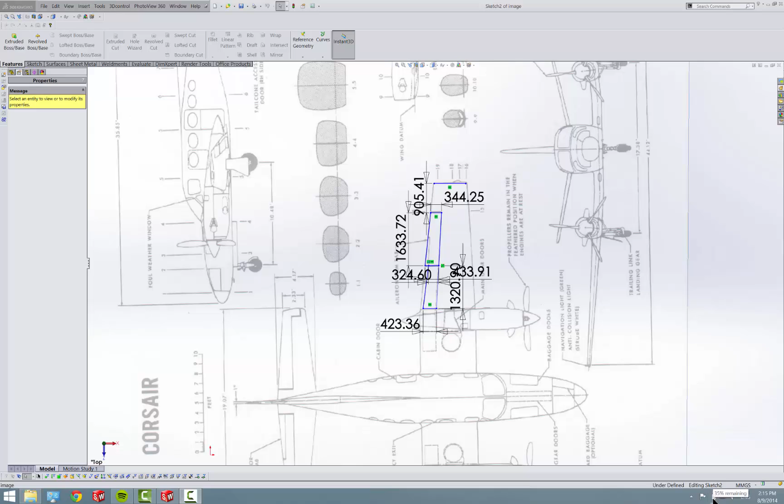Okay, so we're going to work on the nozzle now, the nacelle, the engine covering basically. And how I'm going to do that is I'm going to delete these first because they're kind of in the way. So, hold on. Yep, delete those.

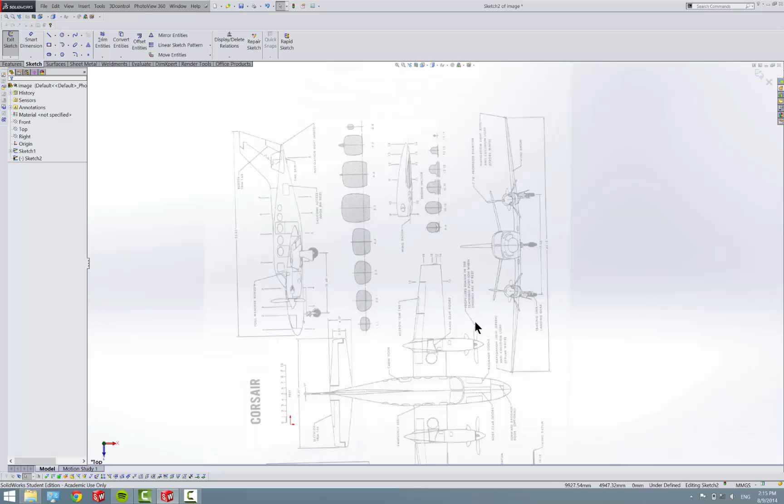In this 3 view, they gave us some nice cross sections here, which will be really useful. What I'm going to do is make sketches and turn those sketches into blocks, just like we did with the airfoils. Make these sketches and then import them into a new part and loft between them all, and it'll make a nice, as close as we can, shape to this. So the first step is...

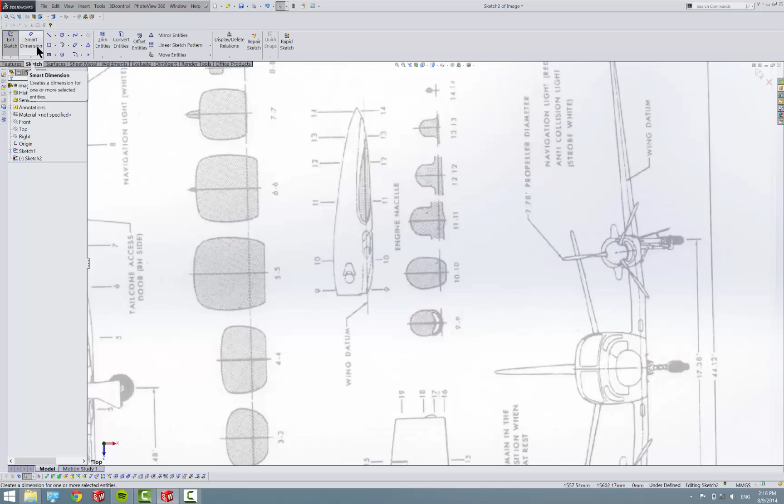So we have a sketch open already. How I'm going to do this is we're going to use splines, which are kind of their own beast in SolidWorks, but SolidWorks handles them much better than something like Pro Engineer or some other programs.

In 2014, I don't know if you're running 2014. If not, you should, because it does have some newer, nicer things. You could always just torrent it, but I didn't say that.

So I'm going to use style splines because they are very, very useful. And the way style splines work is you make construction lines, and anywhere that your spline crosses a construction line, like right there, it's crossing, it's called an inflection point. And if you haven't had calculus or something, an inflection point is where the spline changes its curvature.

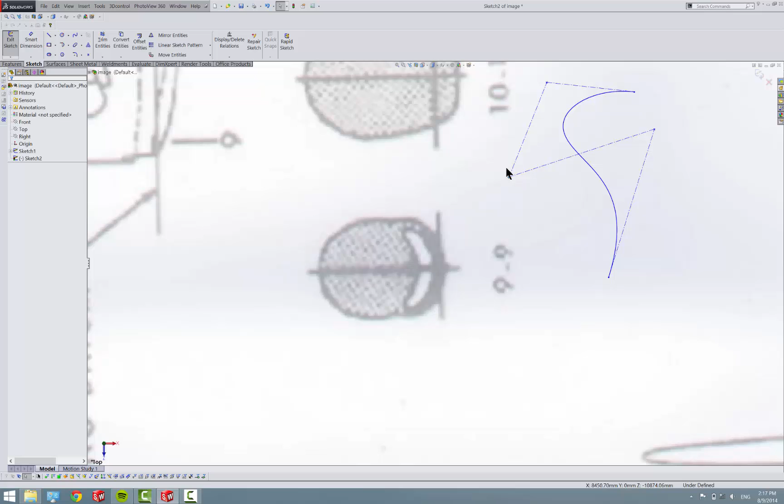So for instance, here it's curved inwards, and it crosses the line and it curves outwards. So that's just kind of something to be aware of, and you change it by changing these handles, and you can make all kinds of cool curves, perfectly shaped and all that. So that's new in 2014, and I gotta say I love them very much.

So we're just going to kind of make it so that it looks right. And I've already made this before, so I know what pattern kind of looks correct. So it took a little bit of tweaking to figure out that this is the kind of shape I needed.

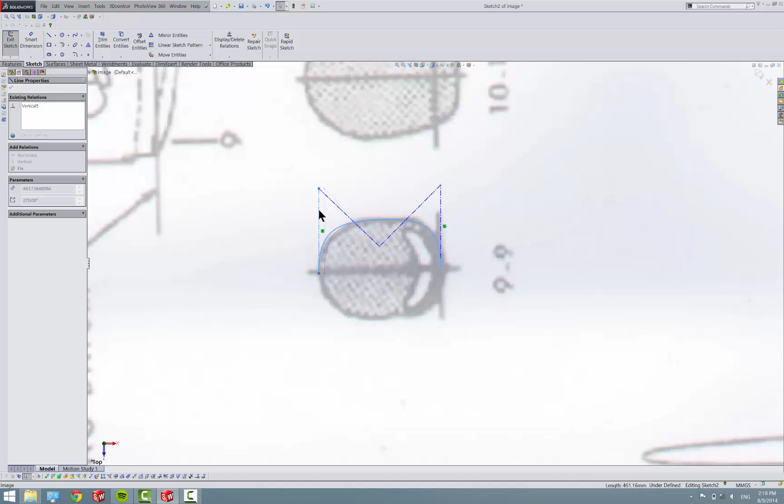It's very important to make sure that these are both either vertical or horizontal, one of the two, because whenever you mirror them, you want this face to be tangent, this seam, because otherwise you'll have a seam in your end result, which is not a huge deal, but since we have the power to avoid it, we're going to try our best. Make sure they're vertical because we're going to mirror it across.

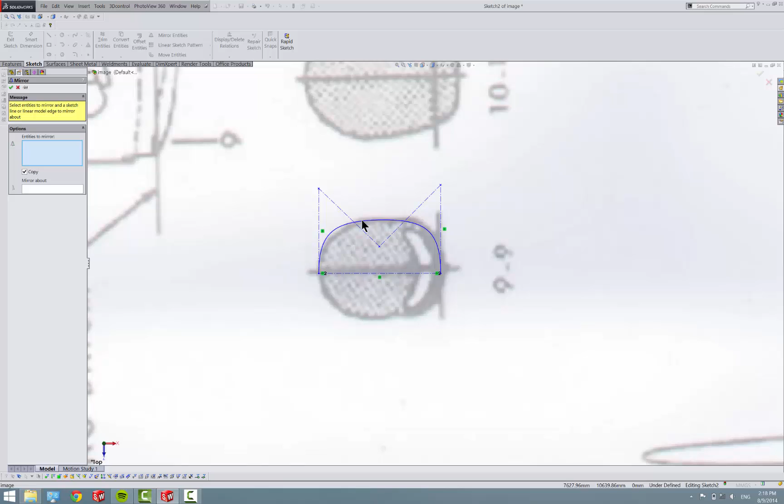And while we're at mirroring, might as well put a center line through, and then mirror that through that. And now we're going to fine tune it a little bit. So we're going to move the mirror line closer, adjust these so that they look a little bit more accurate. So that looks pretty good.

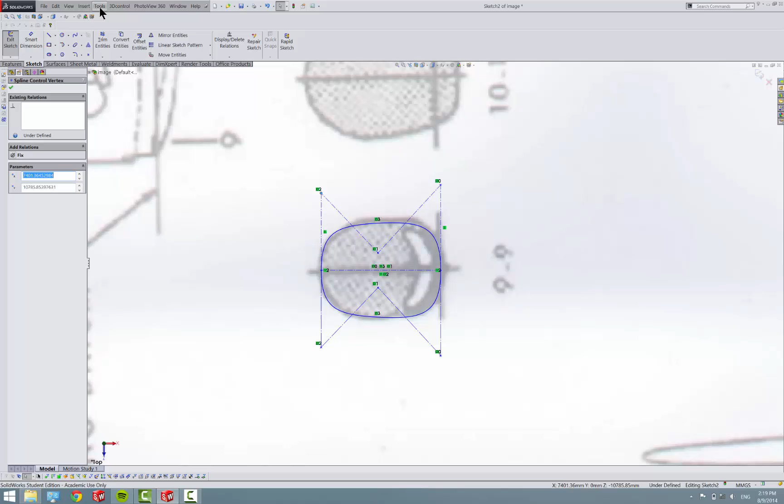So we're going to go to Tools, Blocks, Save. I'm going to save it as Profile 1.

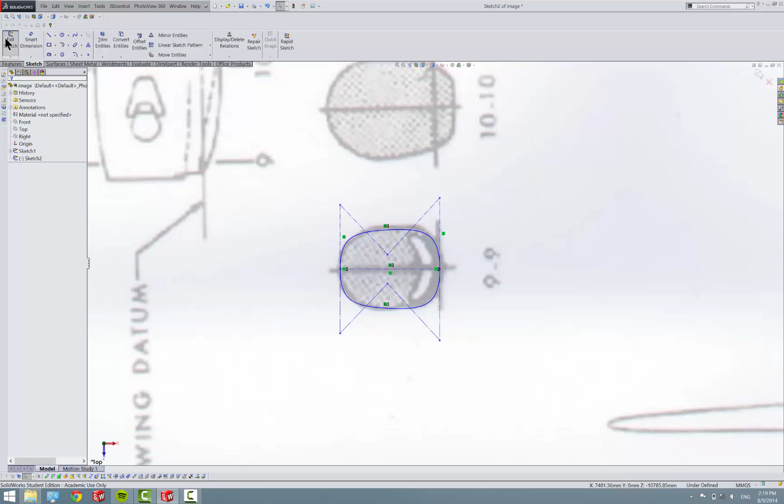Okay, and then we're going to exit the sketch and then make a new sketch on the top plane. And then we're going to do the same thing. I'm going to do 2 of these just to kind of show you what to do. They're all really the same, so I'm not going to waste the precious video time showing you the same thing over and over again, as I'm sure you're already tired of seeing.

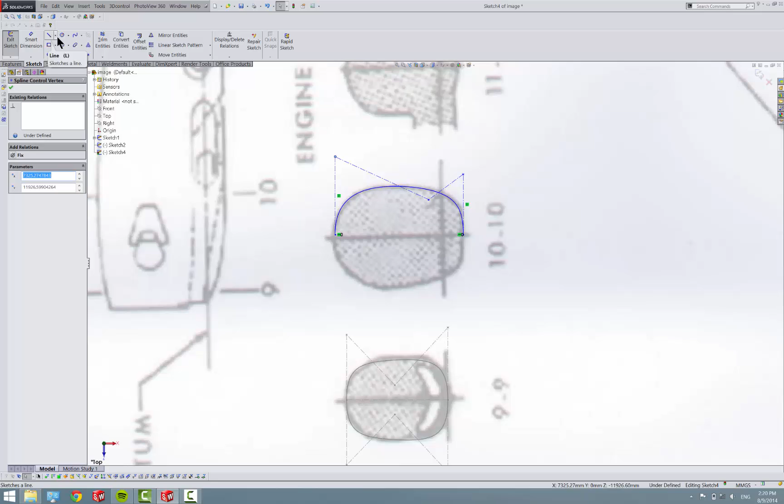But there is one important thing that I want to point out. You just kind of gotta fiddle with it. That looks pretty good. And mirror it. And adjust this line a little bit.

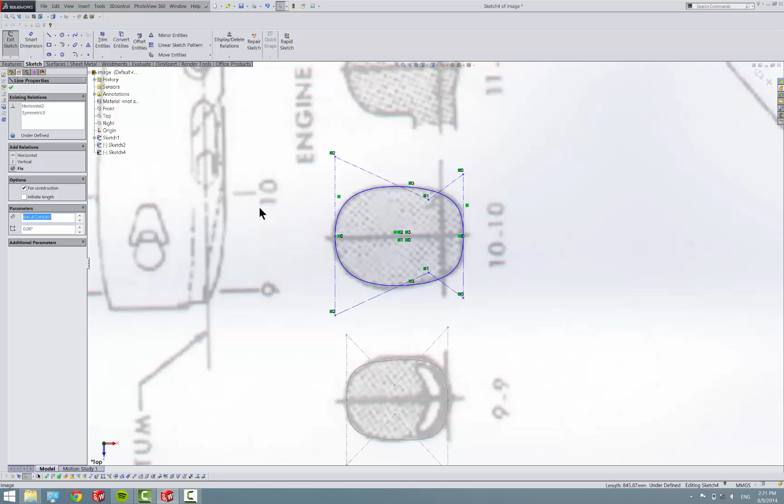Okay, now what I was saying that's really important is you'll see how they put a line clear through, and I like to think of that as my origin line. And so for this sketch, the origin line is right at this point. For this sketch, the origin line we're going to have to draw. I guess the correct word for it is datum, the point of reference. And put that...

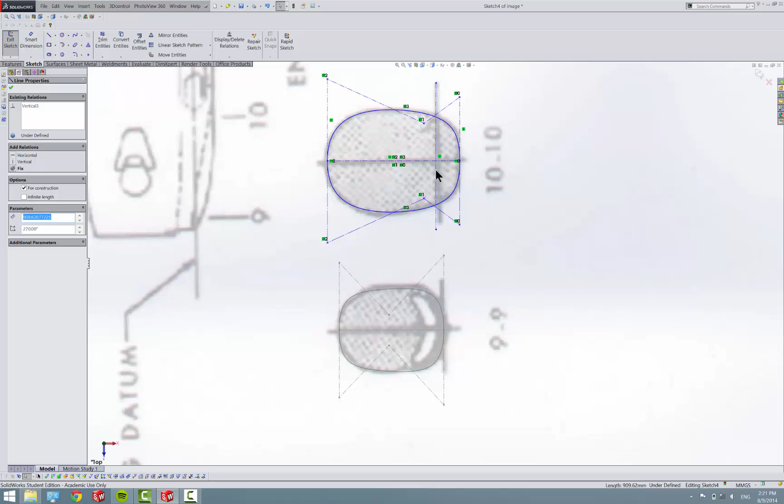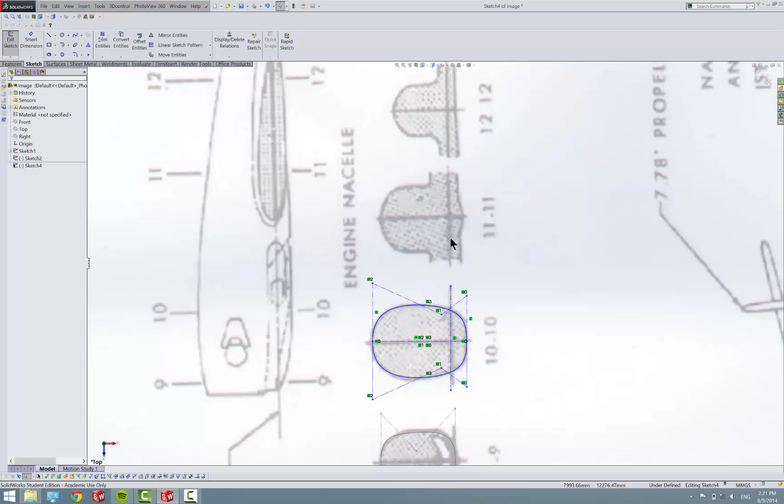Right there. So now what we're going to do is whenever we put all these sketches into its part, we're going to line up this, and that'll keep everything perfectly in line. Now, and then you're going to save this as a block. I've already gone through and made all of these, and for these, just don't worry about that. That's the wing, and we'll incorporate that later. So that's how you make them.

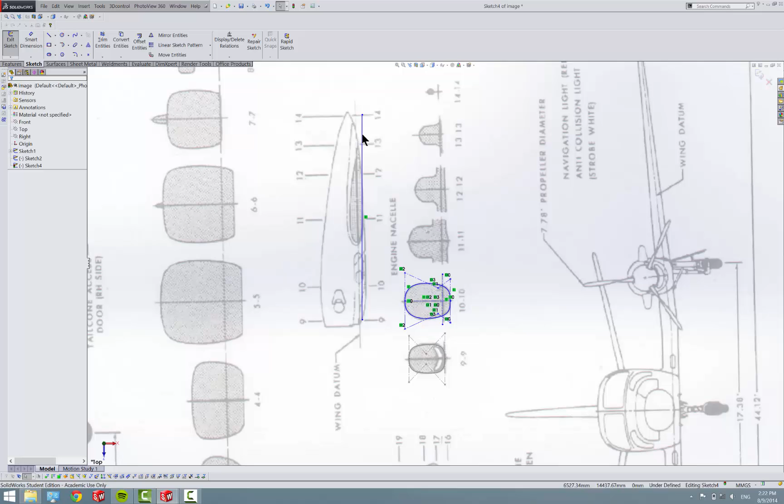I'm going to show you how we loft them together. So we're going to make a new part. And, well, one thing, we need to know how far apart to put our planes. So these are our corresponding plane references. And the way I do this is I put a line between the two. And then you right click the line and do split entities, and just come along and split the line up, and then dimension it.

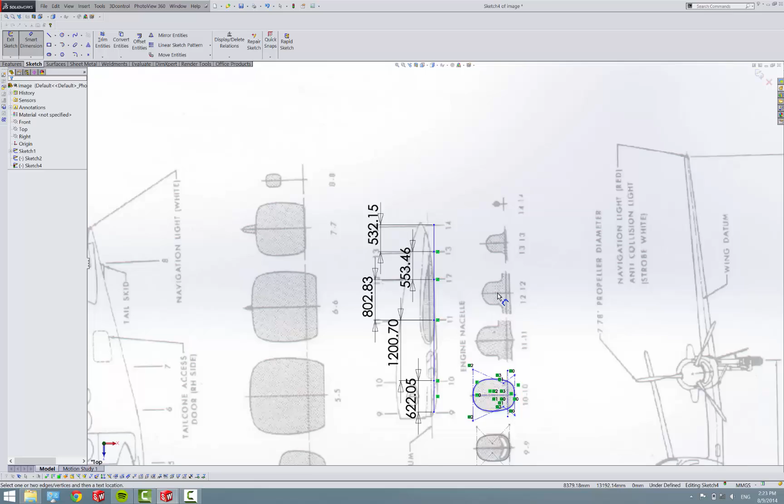Okay, so we've got that all figured out. Now we need to go and make our planes in our part.

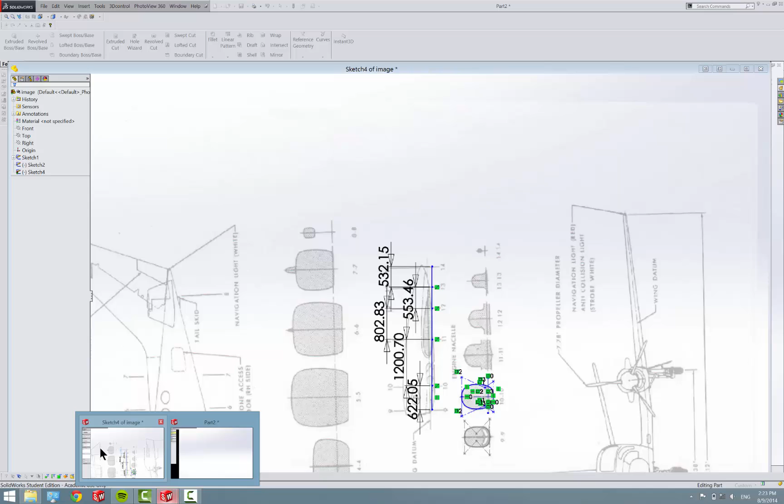So, feature, reference plane, we'll go off the front plane. And the first one is offset by 622. I'm going to flip it because that seems like the appropriate way to put it.

And then we're going to put another plane in reference to that plane, flip it. That is 1200. And then another plane, and that is 800.

Once more, 550. And 530.

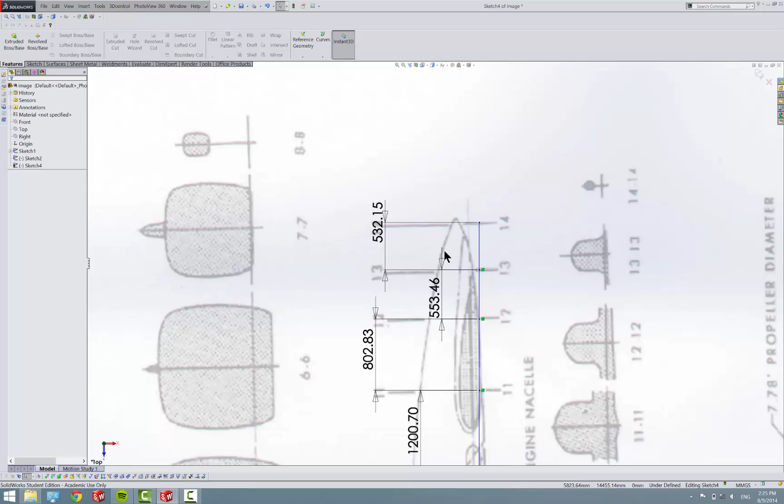Okay, so we got our planes set up. And then what we're going to do is put sketches on each of our planes. So put a sketch on the front plane.

We go to Insert - not insert, tools, blocks, insert, browse, Odesk, Cessna, and here's all the profiles I made. So profile 1.

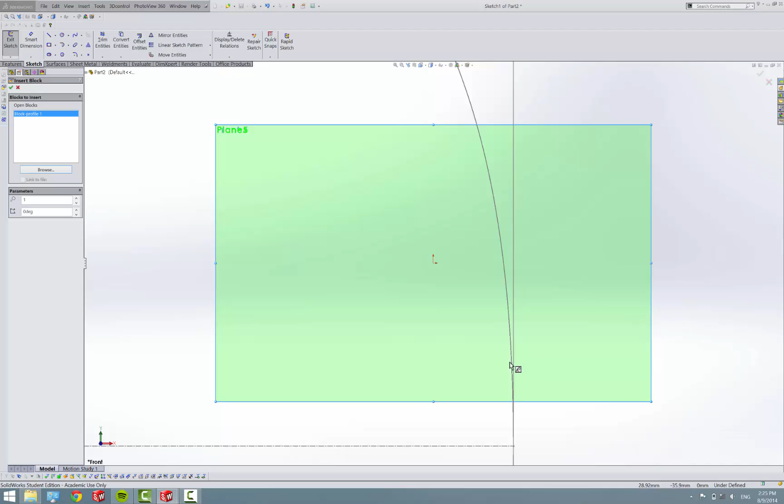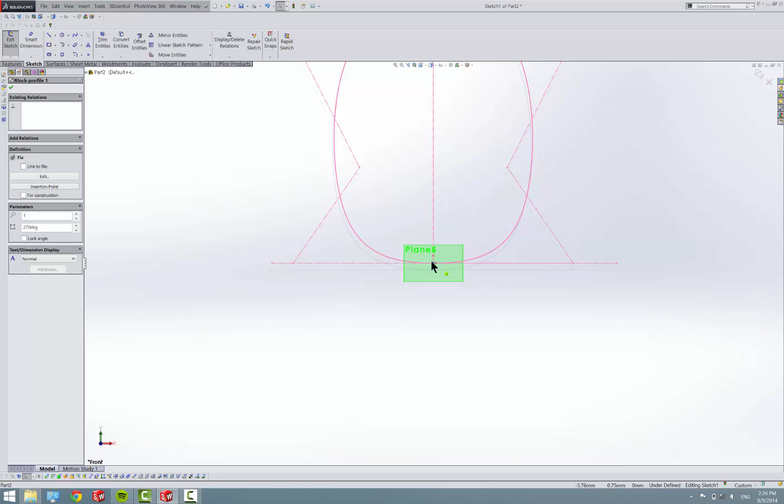Now you'll notice it is sideways, so we'll go to rotate, select, center rotation, about the origin, oops, minus 90. And then we set up our datum line onto our origin, and exit that sketch. So there's our first piece of the skeleton.

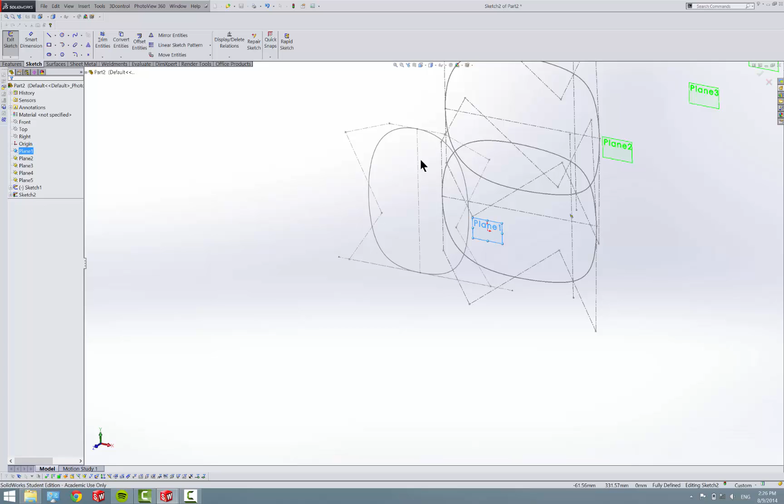Put a sketch on the next plane. Tools, blocks, insert, browse. We'll rotate it. Oops, I pressed escape.

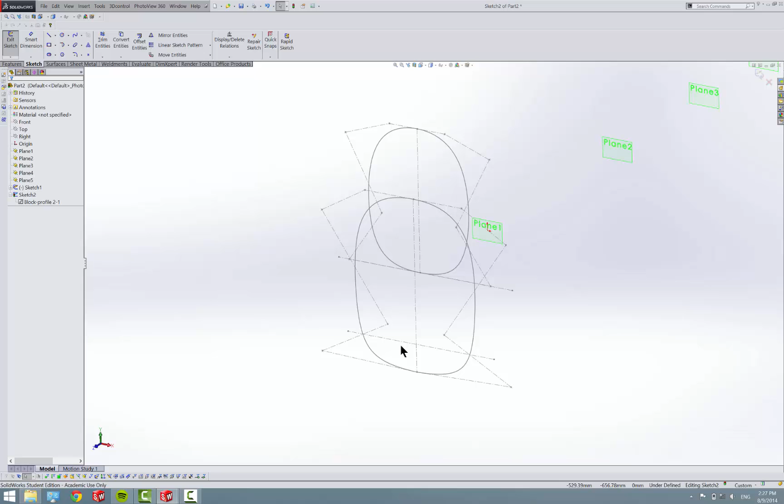I guess I forgot to put the points at the intersection when I made these. So we'll just come in and put a point.

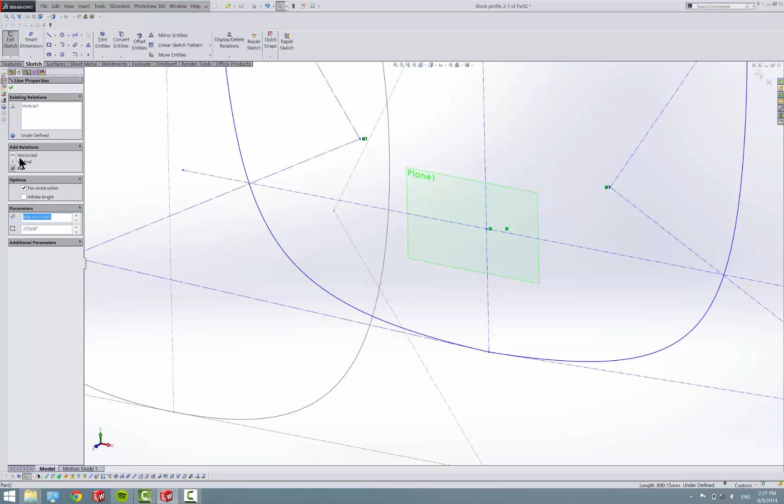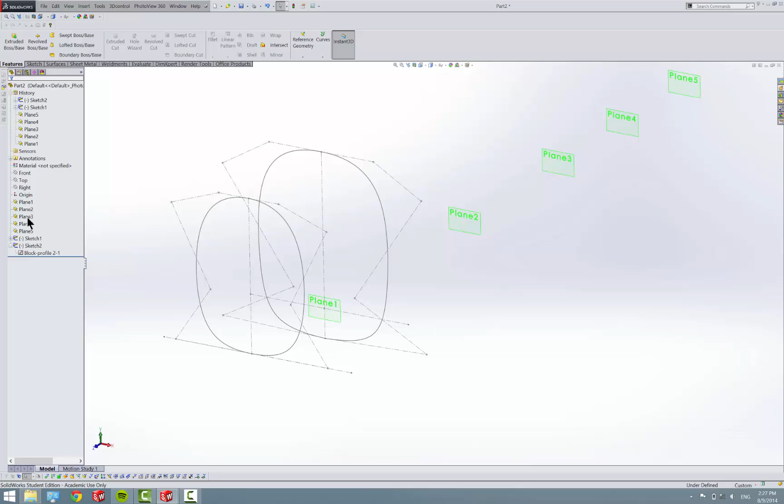Okay. Then we put another sketch.

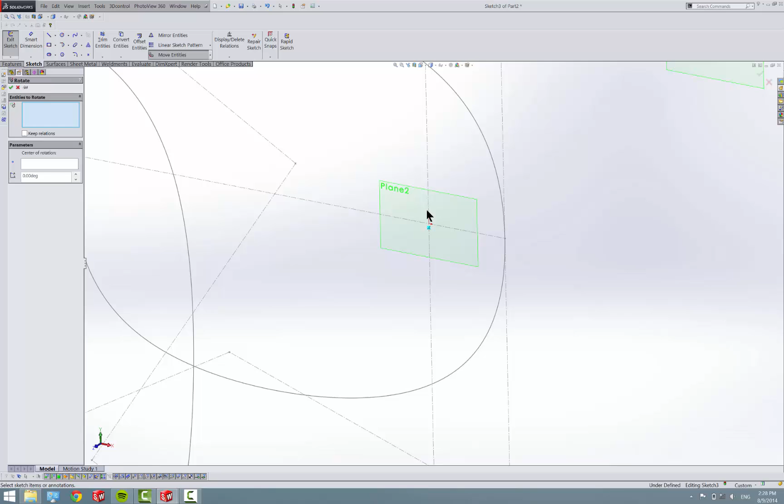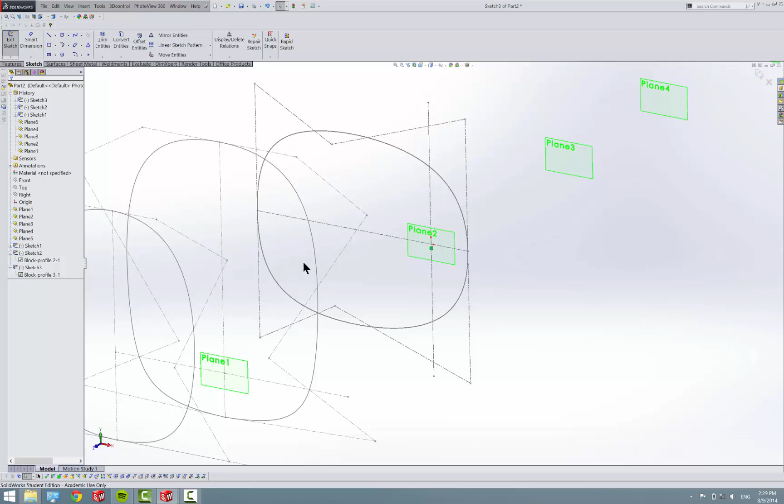How did that work? I should probably just edit most of this out because it is probably kind of boring to watch this. There we go.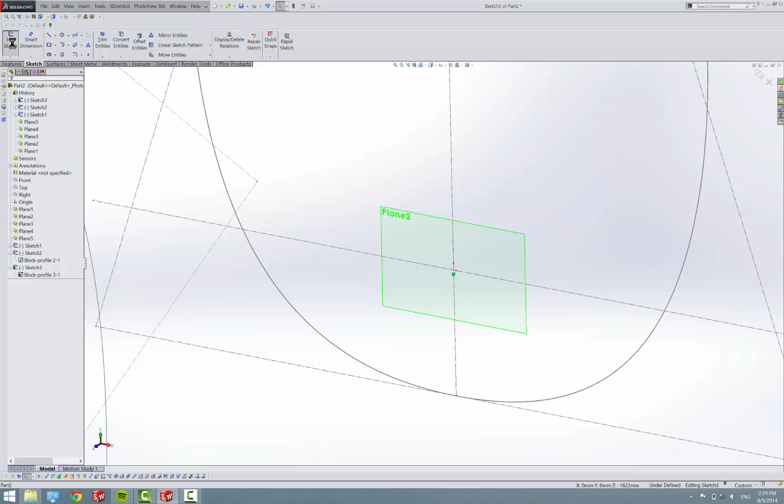Now you'll see we're starting to get the skeleton shape made up.

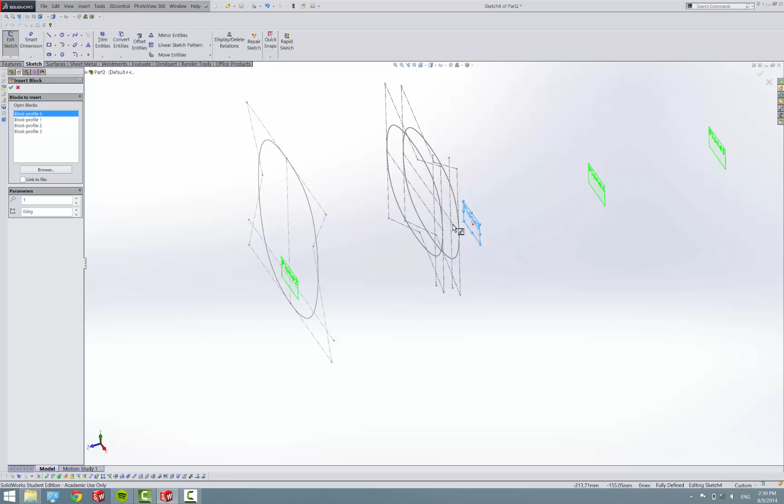I keep pressing escape for some reason. You would think I would know by now.

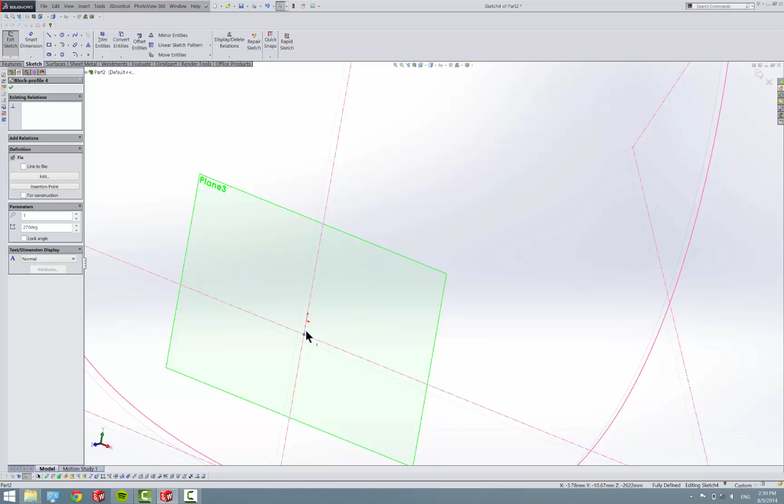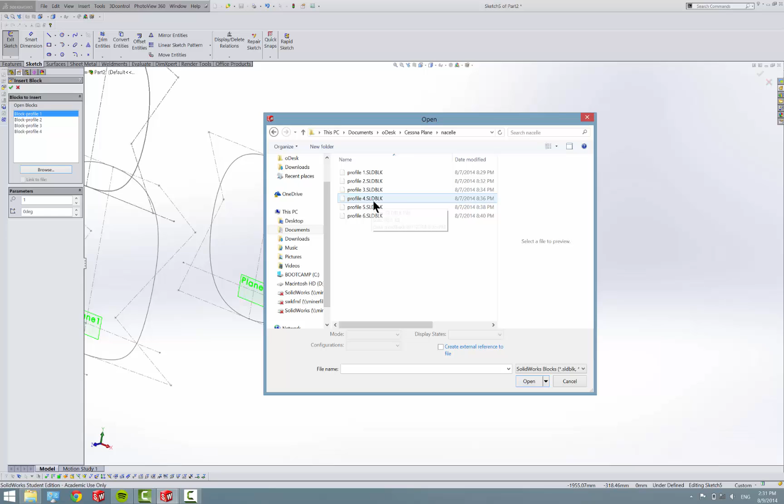Okay, and another one. And one more to insert.

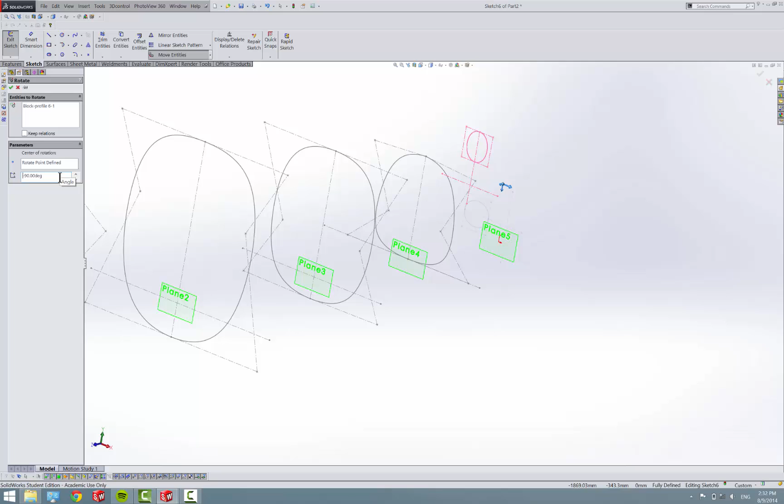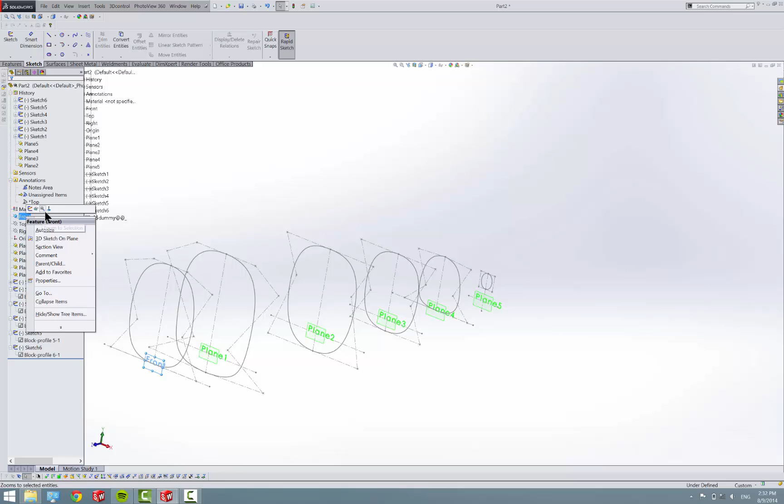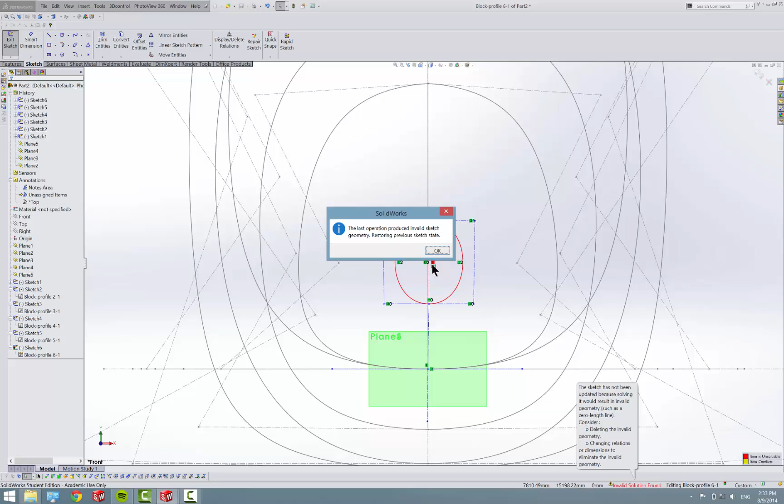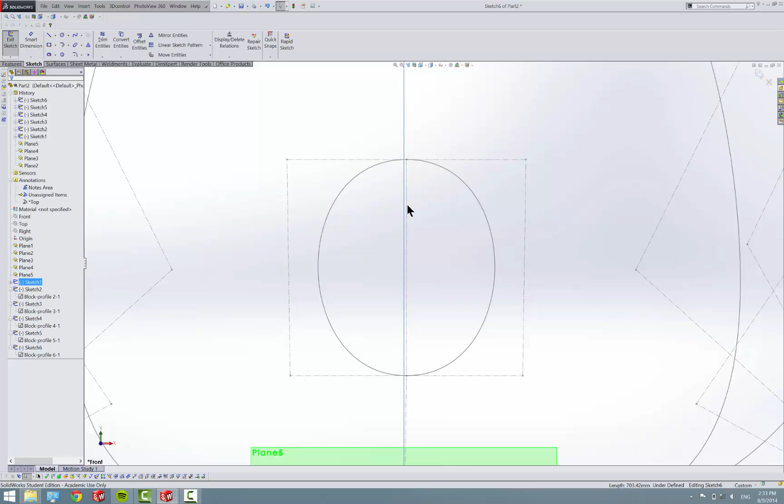Okay, so the way to check this is to go to the front view, and it looks like one of them isn't in line for some reason, and it looks like it's sketch 6 because it looks like it's not vertical, so that must have been just weird.

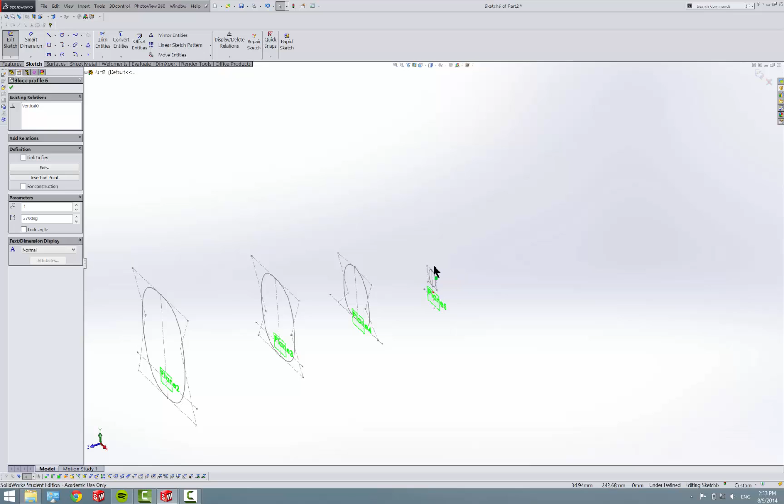Let me just try deleting this and retrying it. I don't know why. Block, insert, profile 6.

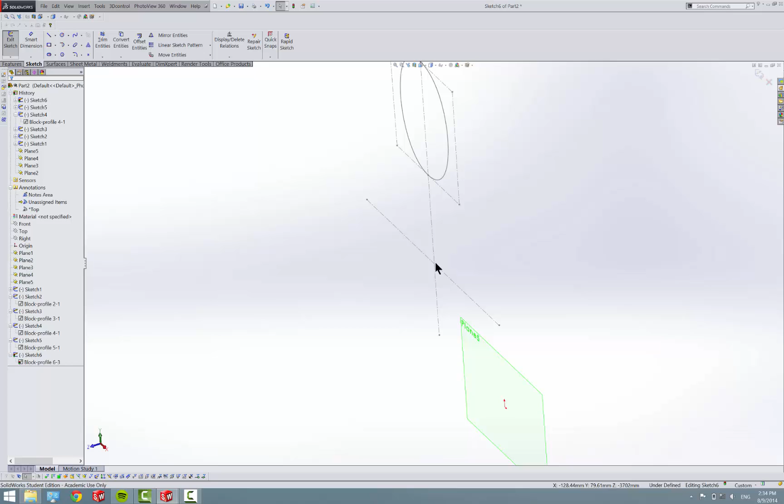Okay, that looks better.

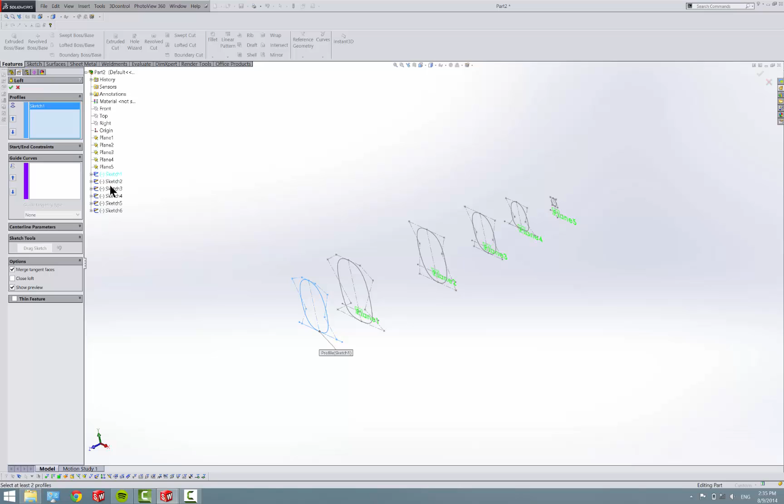So now, I'll show you what happens if we do a loft right now without any extra work. I mean, it's not bad, but it's also, oops, not really what we're looking for.

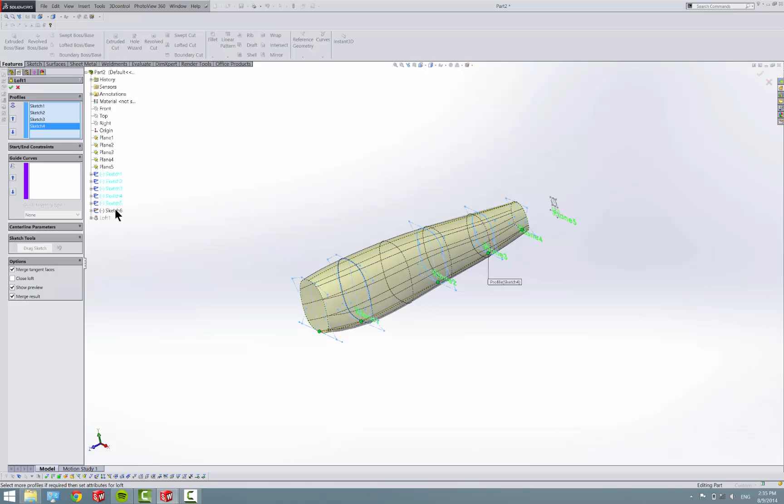Come on. So we get something like that, and you'll see it's all curvy and not straight, and it's just not good. The way to fix that is to put guide curves in.

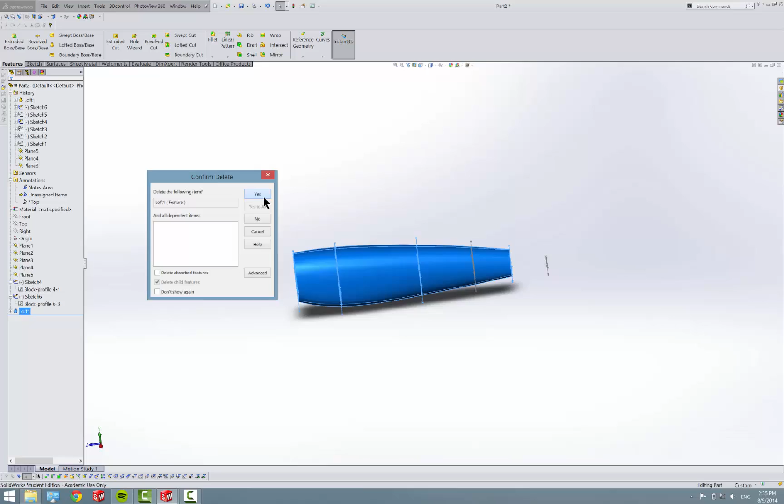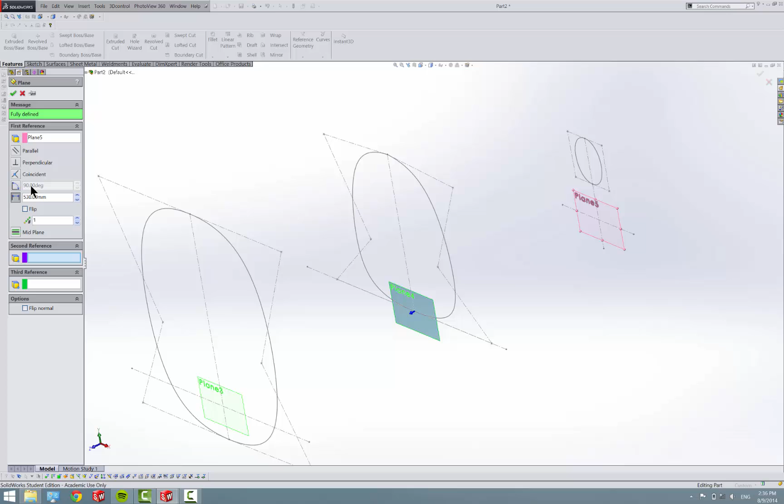First we need to put something to put our guide curve on. We don't want to stop straight, so I'm going to put a plane, maybe set from that plane, I don't know, maybe 50 millimeters. We'll do 75. That'll do.

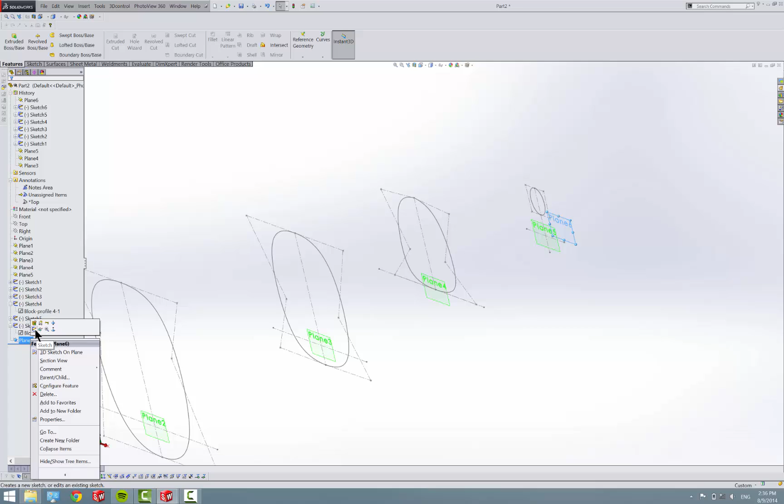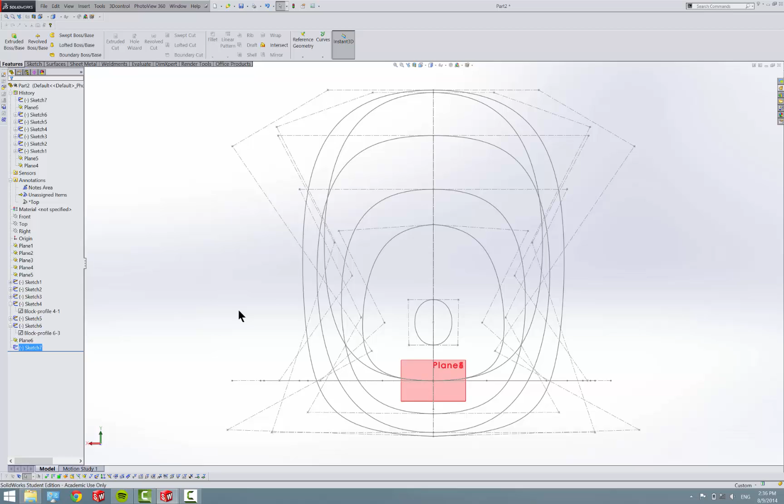We'll put a sketch on it, and let's put normal to, and I want it to be in the center of that. Okay, so now I already just got kind of a point there.

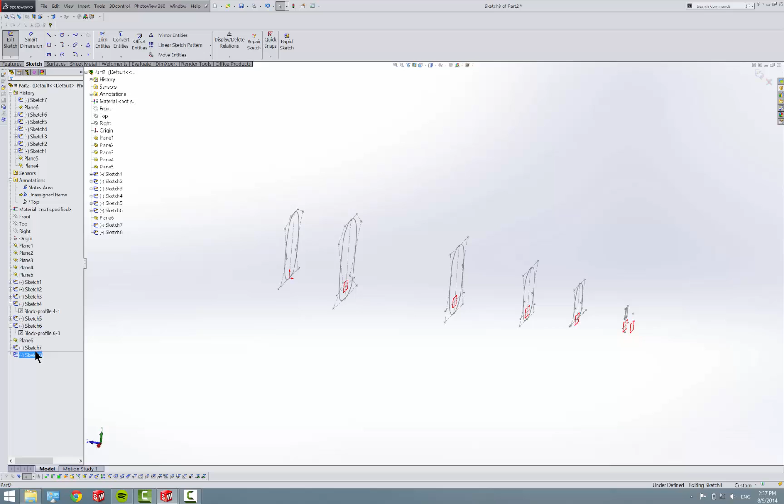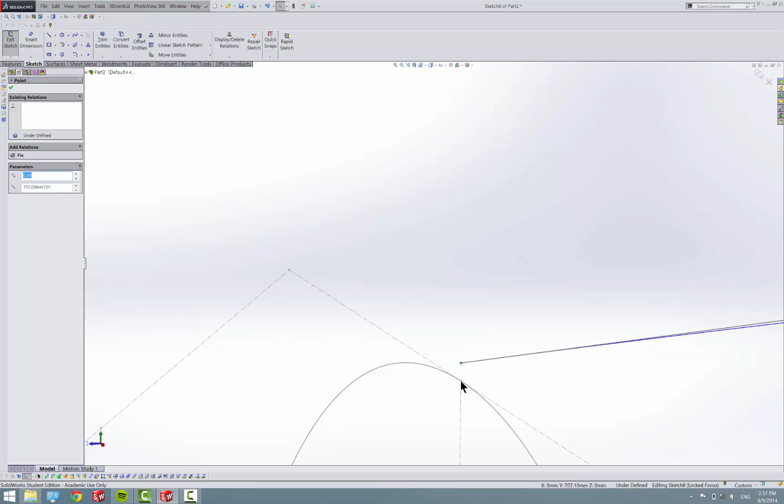So now we can put our guide curve in on the right plane. And the key to this is, I'm going to put a regular spline through. The key to this is every piece of the spline has to touch a profile. And we have to do that by hand to ensure, because you could try to do it automatically, but it likely won't work the first time.

So we got to come in, and pierce is the relationship we want to use. So it kind of pierces the line. I don't know where the name came from, but that's what it's called.

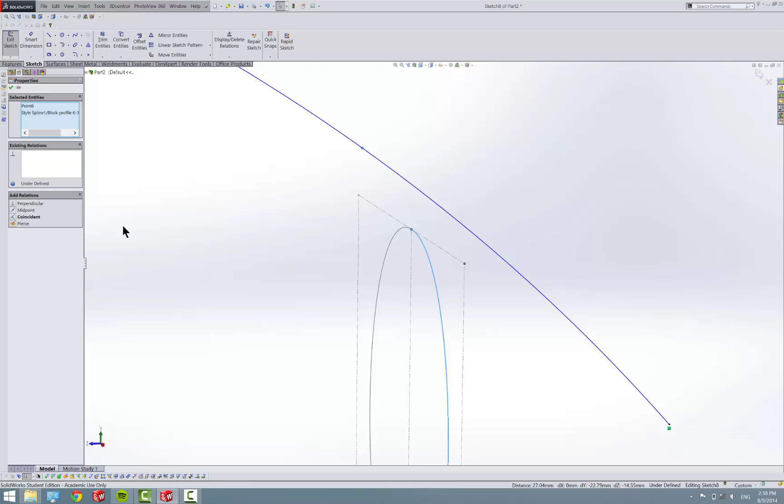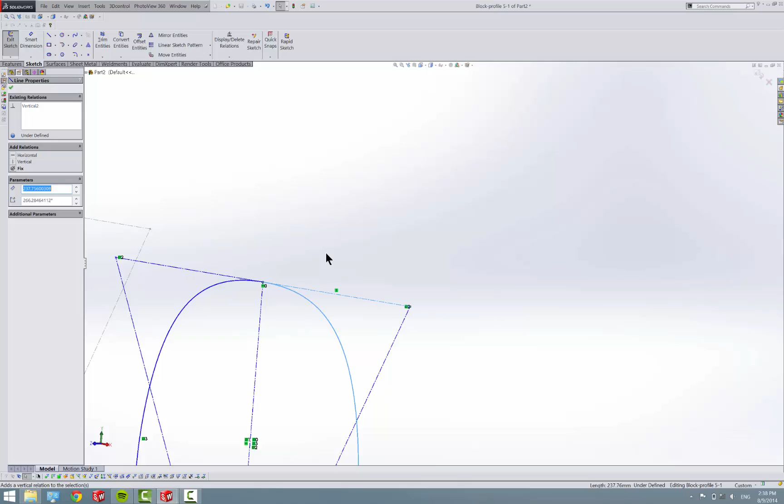Oops, not coincident. Okay, and I just noticed looking at this, first off, let's exit that sketch. Looking at this sketch here, these were not made to be in line, so you just come in and fix it.

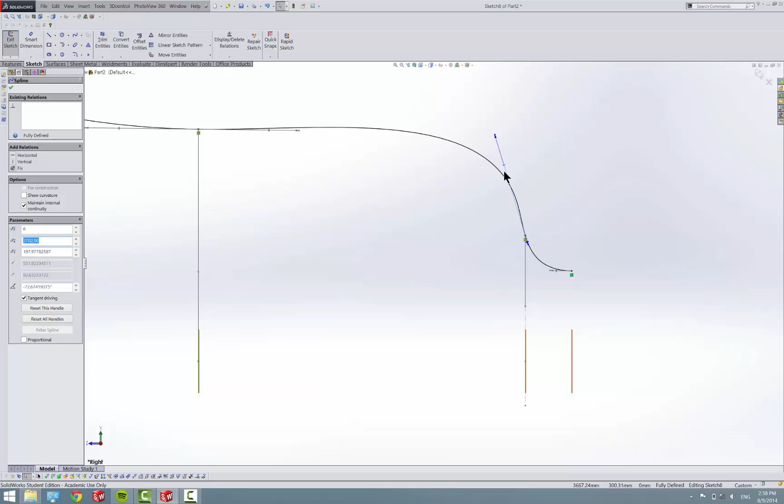Alright, so now we are looking at this sketch. It looks pretty good, except I want this to be vertical. Oops, no. Alright, that might just mess with this a little bit. That looks pretty good.

And then we do another sketch on the right plane, on the bottom side.

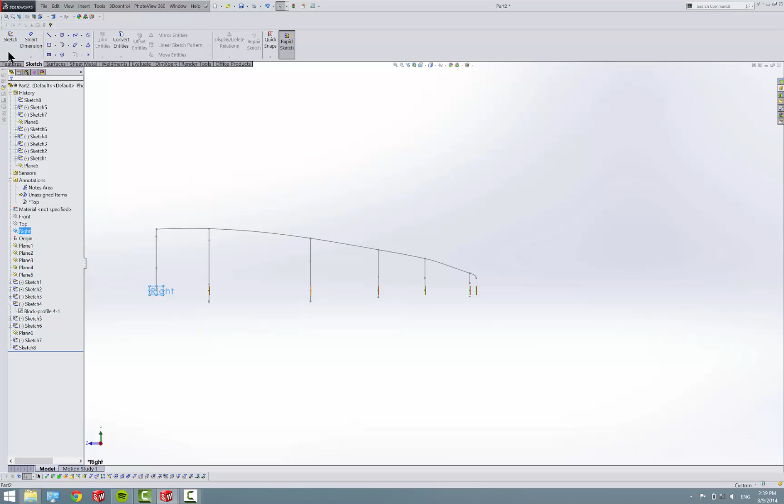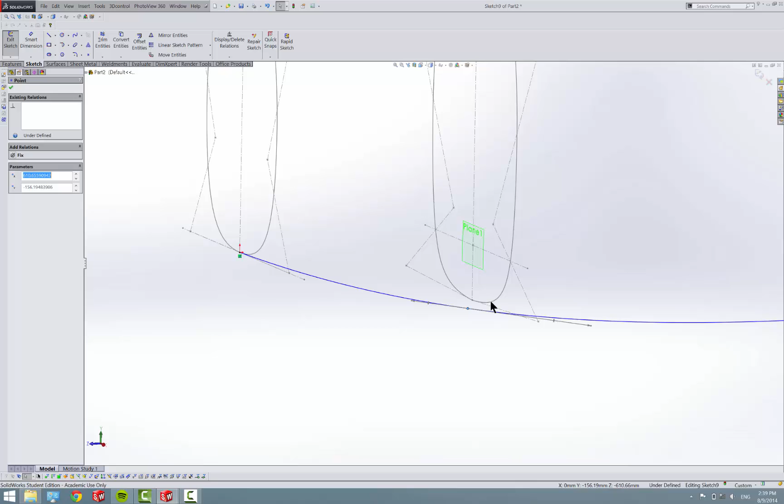Okay, so that point pierces that line, and that point pierces that line.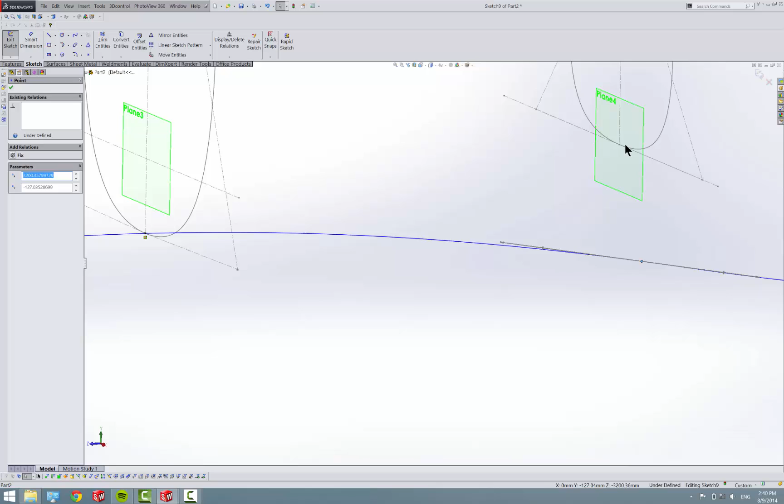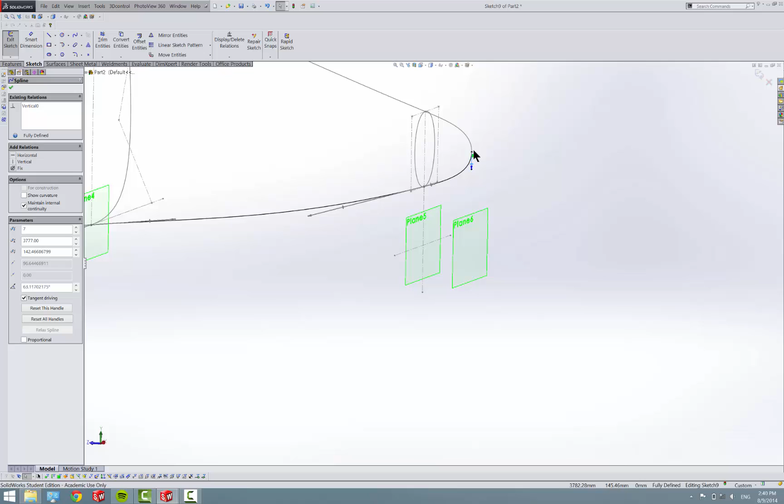Okay, same thing, we'll come in and make this one vertical, which means tangent to there. And kind of try to make these - this area right through here doesn't really matter because it'll be in the wing, so we only really care about this part up here.

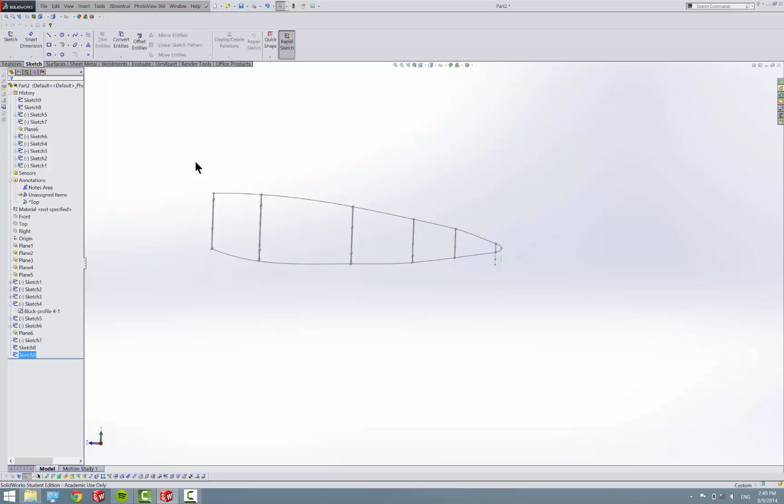So exit out of that sketch, and now we are ready to loft. So we'll go with that sketch, 3, 4, 5, 6, and then the point at the end, and now our guide curves.

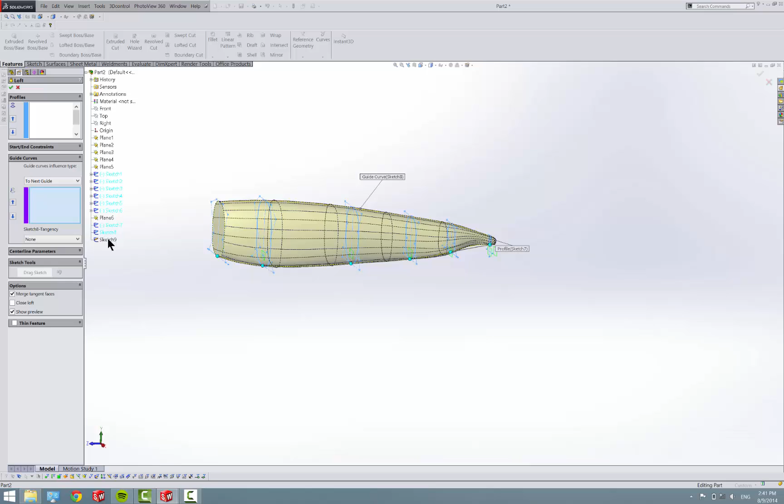And there we go. That is our engine nozzle. And if you take the lines off, you'll notice there's no seam, which is what we look for.

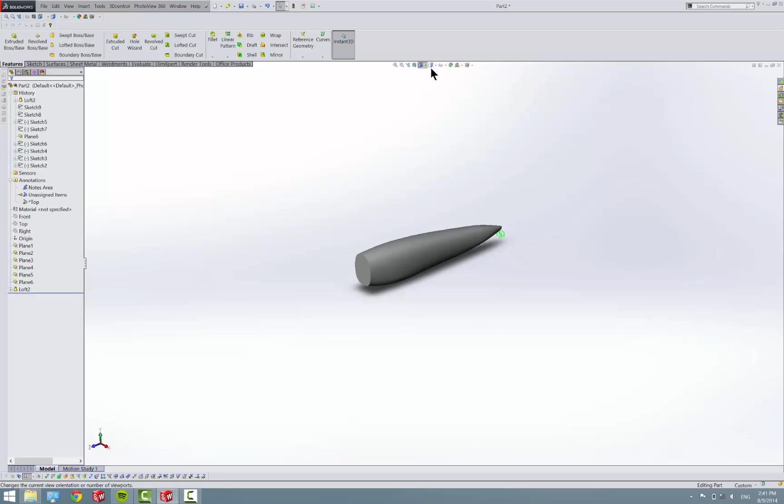Okay, and in the next one I will show you how to put this onto the center wing. Yeah, that sounds good.